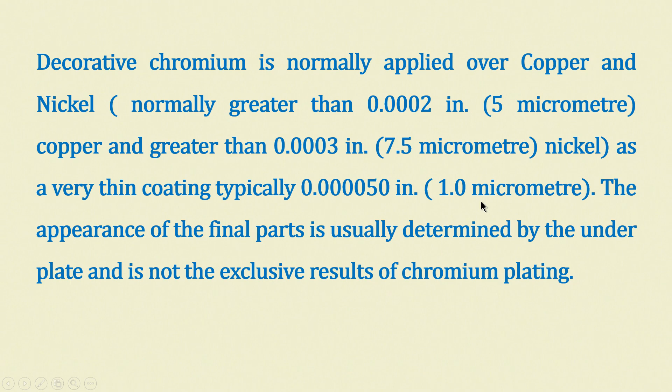So, decorative chromium is also employed normally over copper and nickel. Copper flash is required, nickel is there, and I have written here 5 micron, 7.5 micron, etc., and a very thin coating, typically of 1 micrometer, 1 micron. Micrometer and microns are same. So, the appearance of final parts is usually determined by the underplate and it is not exclusive results of chromium plating. There is another type of coating, that is hard chromium coating.

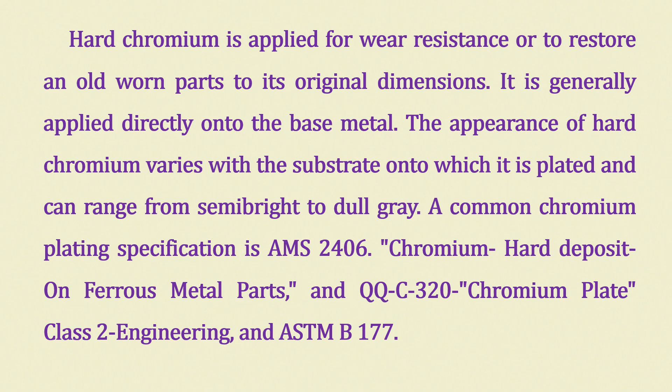Hard chromium coating is applied for steels and iron materials for wear resistance properties. So, it is also used to restore old worn parts to their original dimensions, etc. This also I had shown you in my last class. And hard chromium plating, I want to tell you, is something like a garage industry. A lot of people in small garages, tiny industries, make hard chrome plating especially for functional wear resistance of metals, etc.

Very small components are also required, and the hard chromium plating usually will extend from about 15 to 30 microns. That is a very hard coating, but the material for hard coating is potassium dichromate or sodium dichromate. Compared to sodium dichromate, potassium dichromate is more soluble. So, people use potassium dichromate, and the waste that comes out will be hexavalent chromium, and that is carcinogenic and toxic, which we do not approve as an environmental contaminant. We do not want it.

So, with hard chromium plating one has to be really careful how we manage it. Spillage, etc. is very difficult. I have already talked to you about chromium plating in Bangalore. Lot of people since the 1950s and 60s have thrown their waste in and around Peenya, and now most of the underground water is contaminated with hexavalent chromium. We need a special treatment to clean the aquifers containing chromium. Okay. So, we will discuss about it again later.

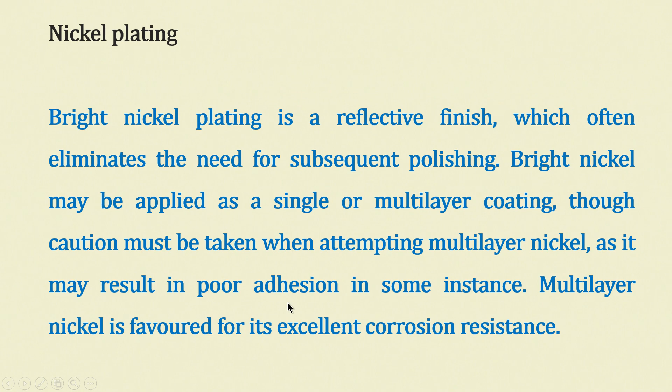Then I want to talk to you about nickel plating. Bright nickel plating is a very reflective finish. It looks like a nice mirror, which often eliminates the need for subsequent polishing. Bright nickel plating may be applied as a single or multi-layer coating, although caution must be taken when attempting multi-layer nickel because of the adherence properties. Its adherence properties are fairly poor in some instances. Multi-layer nickel, however, is favored for corrosion resistance. So, different kinds of nickel plating are there.

And for applications requiring bright nickel, there are other considerations. For example, the brighter the nickel plating, the greater would be the internal stresses and lower would be the ductility. Why? Because ductility and brightness go together. If the material is very thin, it will give a beautiful finish like a mirror, and if it is very thin, ductility will be the problem. The metal may tear off at several places.

So, the brightest finishes result from first polishing the base material itself. I have to take the base material, keep on polishing using different kinds of chemicals as well as metal cloth and emery and many other things until I get almost a mirror finish. Over that, the nickel has to be plated. So, it is best to avoid specifying bright nickel if the parts are to be bent or crimped after plating. Why? Because of this ductility problem.

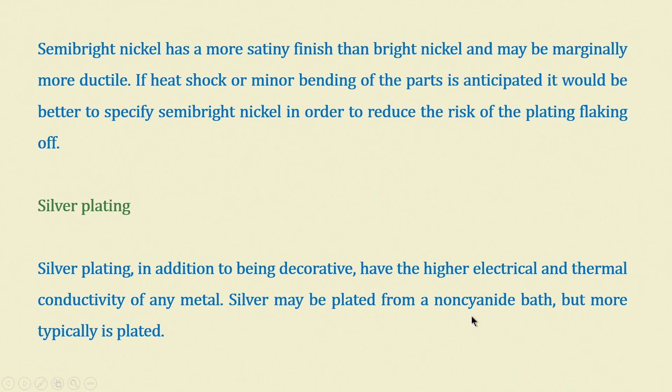So, matte silver finish plate, nowadays a lot of people use them as ornaments and jewelry. It is used extensively for finishing electronic components also, where silver's mechanical, electrical and thermal properties offer distinct advantages over other metallic properties, even silver finish also.

Semi bright silver plate is often specified where electrical and mechanical properties need to be considered, and sometimes the design engineers will specify that appearance may also be an important consideration. So, in such cases we should go for semi bright silver plate, and the problem is it tarnishes much faster than matte silver.

Most of the silver plating, usually when exposed to atmosphere, reacts with the sulphide in the atmosphere, and they form silver sulphide. So, it is one of the practical difficulties of maintenance of silver coated materials, especially if it is functional, then it is much more difficult to manage.

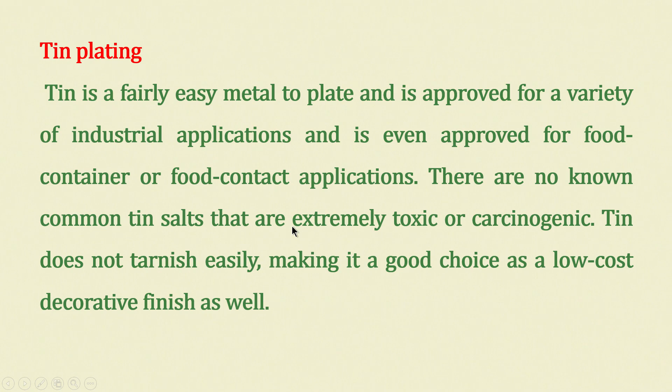There are a great many applications calling for tin combined with other metals being plated as an alloy. These include MIL-L-46064 and MIL-P-81728, both of which are for tin lead, and MIL-P-23408 for tin cadmium. Tin also may be plated as a tin nickel alloy, which is sometimes used as a substitute for decorative chromium.

So, zinc plating is a very important plating. Zinc itself provides a soft ductile decorative coating, and it is marginally solderable. It gives a corrosion resistant finish. Unlike most other commonly plated metals, zinc protects the substrate by sacrificing itself. It is a very reactive material, and people do not mind sacrificing zinc because it is cost effective.

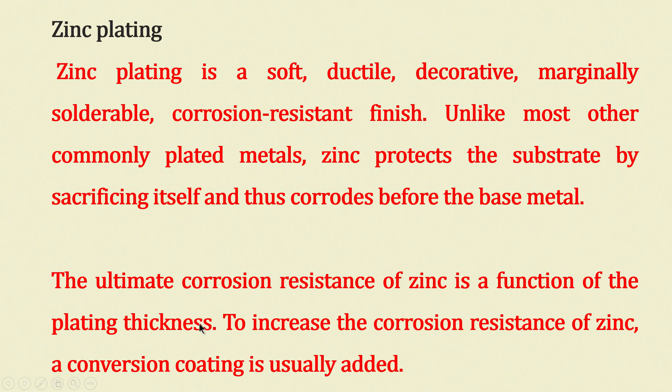For further information. Usually people used to coat zinc with cyanide. Again, environmental considerations normally do not permit cyanide plating. So, nowadays there are processes which use zinc chloride as an electrolyte, introduced since 1980 only. And when the environmental pressure began to mount, replacement of cyanide became necessary in most of the countries, and non-cyanide baths have been developed over the last 20-30 years.

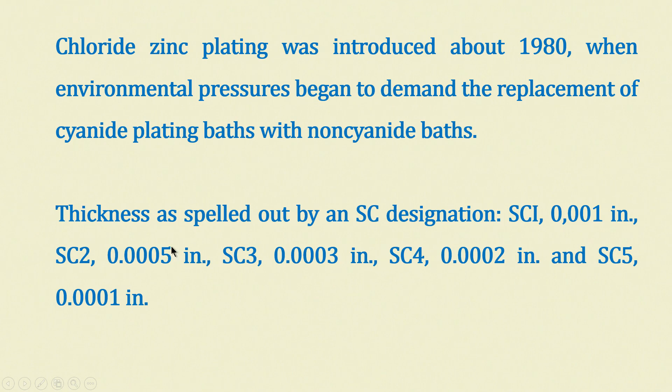Okay. Now, chromate coatings, I want to talk to you because chromate coating is different from chromium plating. So, chromate coating is just a chemical conversion. The substrate metal participates in the coating reaction and becomes a component of the coating. Zinc chromate, for example, is a chromate coating, it is not chromium plating. So, this kind of combination has a profound effect on the properties of coatings also.

Actually, zinc chromate looks blackish, it does not look decorative and it does not look bright also. But there are several coatings which are colored; gold, yellow chromate coatings are possible from baths that contain chromate and sulphate. For that we have to add sulphate and chloride activators and then produce an iridescent golden yellow color.

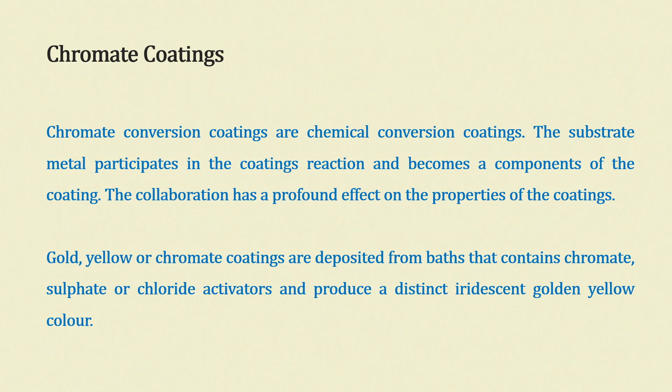So, black chromate is usually achieved by incorporating a soluble silver salt in a golden chromate formula, and these formulas I am talking about are available in almost all plating handbooks. You see, anyone professional enough to undertake electroplating would be buying the anodes, cathodes, electroplating baths and electrolytes. Sometimes they will even purchase rectifiers and other things that are required for coating.

Now, a lot of people sell ready-made solutions for specific finishes, that is ready-made electrolytes, and the specialization comes from adding a little bit of other chemicals providing specific properties. So, all you have to do if you want to do a coating is buy the required kind of chemicals from the suppliers, and they all become proprietary chemicals.

But some of the proprietary chemical compositions are well known, and there are plating professionals, companies who produce electrolytes, cathodes, anodes, etc. They also produce handbooks to give you certain information about quality control, quality plating and all those things. These handbooks are also sold across the shelf. You can order your handbook and then start planning your industry also.

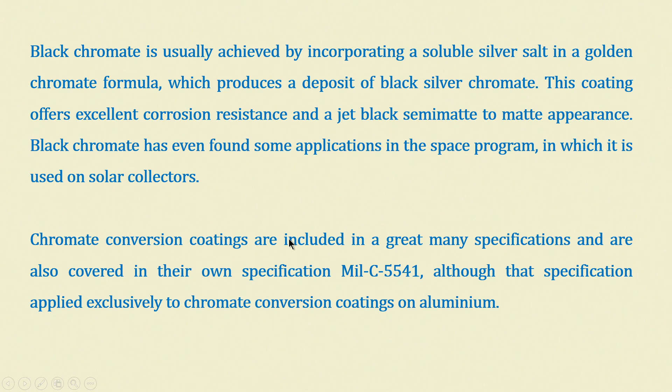Aluminum also can be coated, given a coating of chromate. So, then there are special processes, and these are known by their own names. For example, chemical etching. Chemical etching is not a polishing process. It cannot be used to remove deep scratches or anything like that, but it is a coating all the same. So, typically less than 0.0005 inch of material is removed by the chemical etching process,

and then that can be coated or painted or whatever you wish to give the finish. Sometimes the knobs on the instrument, they are all bright yellow finish or bright aluminum finish, but with black marking. They are all in spectrophotometers, etc. The wavelength can be written on those plates, etc. So, if you see a bright aluminum finish with black marking, they are all chemically etched materials.

So, chemical etching is also a process which is part of the electroplating system, and typically less than 0.0005 inch of the material is removed before it is painted or coated. So, hydrogen embrittlement relief. Quite often, whenever you are doing electroplating, acids upon reaction with the metal generate hydrogen. This hydrogen gets into the metal matrix, metal plates, either cathode or anode. So, the hydrogen going inside the metal causes the metal to become brittle. That is known as hydrogen embrittlement, a very well known process.

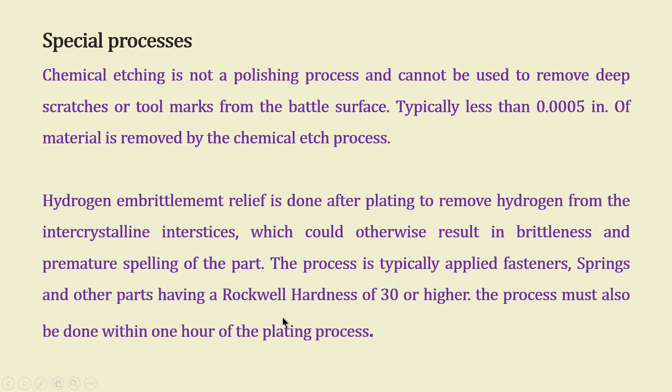And the process must be done within 1 hour of the plating process. Which process? The process of hydrogen embrittlement relief. That process is to be done within 1 hour of the plating process. So, now let us talk a little bit about aluminum finishing. Anodizing is an electrochemical process whereby the naturally occurring oxide coating on the outer surface of an aluminum part is changed to a tightly adhering layer of oxide of specified thickness.

Now, it is a very funny thing. Usually whenever aluminum is produced, when you store the aluminum anywhere open to atmosphere, a thin coating of aluminum oxide forms on all aluminum material. Okay. So, same thing is true with silver also. Whenever you use a silver item, a thin coating of silver oxide is there on the silver metal. Similarly with aluminum. The problem is aluminum coating is fairly hard, whereas silver coating is not that hard. Now, the aluminum coating can be easily damaged due to specific conditions. So, what we want to do is increase the thickness of the aluminum oxide coating.

Most of the time the coatings on metals are of the oxide type only. So, this oxide coating, if I increase its thickness slightly more, makes it functionally more attractive, more resistant to changes, more resistant to the environment. So, natural coating is approximately 0.0000005 inches. You can see here. This is the natural coating of aluminum, so much inch thick, but the anodizing process can increase it to 0.0005 to 0.003 inches. So, from 0.0000005 thickness to 0.003 is almost 1000 or 10,000 times thickness.

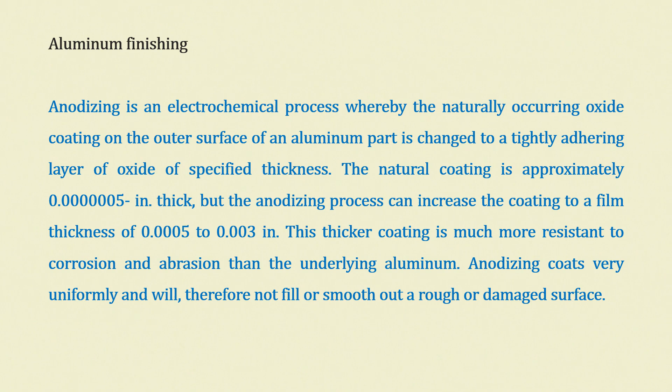This thicker coating is much more resistant to corrosion, very simple to imagine, and to abrasion than the underlying aluminum. That is why aluminum materials always need to be anodized or coated. So, anodizing coats very uniformly and will therefore not fill or smooth out a rough surface. This last sentence is very important for you to understand, because many people have a misconception that anodizing will take care of all the problems. No, an anodizing coat cannot remove a scratch, it just gives a coating over that scratch also. Many people think, okay, I will get the part anodized and the scratch will go. The scratch will not go.

So, it will not fill out or smoothen out a rough patch. For that we have to use mechanical smoothening operations. You can do buffing, you can do milling, you can do many other sand finishing, emery finishing, and very fine finishing, buffing, all those things, and then use the anodization to give a smooth finish or a functional finish.

So, anodizing aluminum has many engineering applications. They have properties related to corrosion resistance. Typically, how do we test whether a substance is corrosion resistant or not? What people normally do is you take the material, put it in a chamber, and after you put it in a chamber, you spray the material with sodium chloride, 1% sodium chloride or 3% sodium chloride or 5%, depending upon the specification. This is known as salt spray.

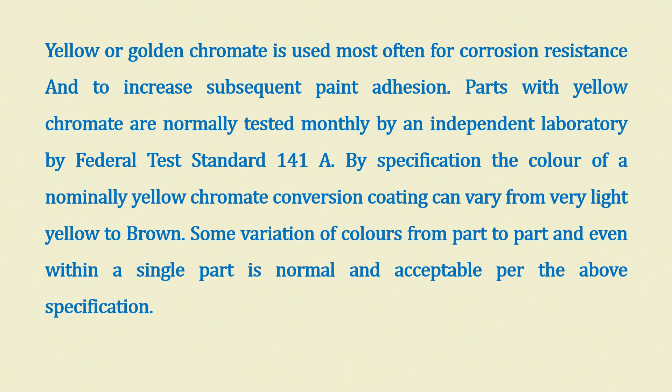So, parts with yellow chromate are normally tested monthly by independent laboratories, and the federal test corresponding to that is 141A. Again you do not have to remember these numbers, but whenever you need something you can get the details. By specification, the color of a nominally yellow chromate conversion coating can vary from very light yellow to a brown finish. Some variation of colors happens from part to part, and even within a single part, according to this standard 141A, but they are all acceptable.

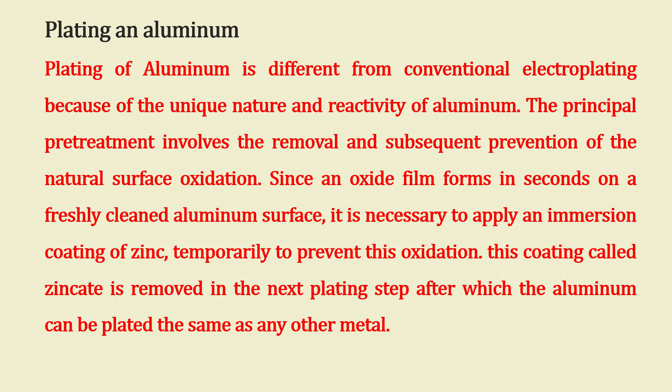So, now we talk of plating on aluminum, not coatings, not anodization, plating. Plating of aluminum is different from conventional electroplating because of the unique nature and reactivity of aluminum. The principal pre-treatment involves the removal and subsequent prevention of the natural surface oxide. Oxide film normally forms within seconds on a freshly cleaned aluminum surface. So, it is necessary to apply an immersion coating of zinc temporarily to prevent this oxidation. It is called a zincate, and that is removed in the next plating step, after which aluminum can be plated like any other material.

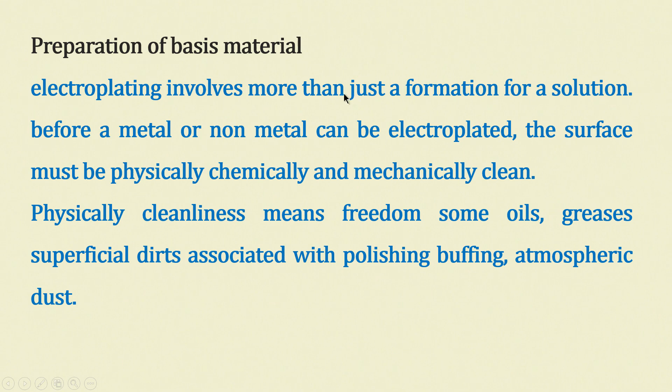So, we will discuss aluminum plating a little more, and then we will move on to other topics. I would suggest that you look up the electroplating processes in detail to get an idea of what kind of wastes are generated. For example, in most of the aluminum coatings, you would always come across chromate as a contaminant. Now, many people would be wondering why chromate comes as a contaminant at all. That comes from the coatings, and now we are discussing the plating.

So, please look up all these plating processes in general. Many of them are textbook topics. Those things I have specified in the course in the beginning itself. Some of the reference books I have already mentioned will deal with these topics.